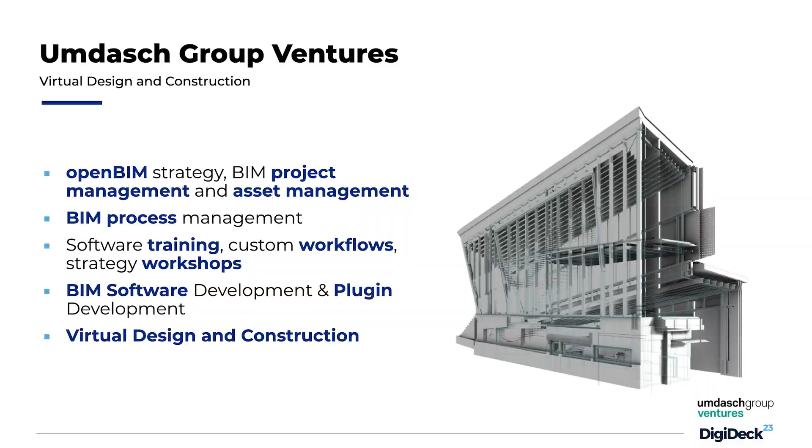We don't really actively consult and provide service for BIM, but we have a virtual design and construction area where we internally set up our open BIM strategy, BIM project management, asset management, and BIM process management. We also do software training depending on our software solution for external clients, but mainly at the moment we focus on our internal organization. So we set up our custom workflows and strategy for the workshops. Of course, we are also developing BIM software and plugin development, and dealing with many other areas.

Especially today, I brought this topic about Metaverse, specifically focused on virtual space, because one of the main core goals of our business is to create spaces. There are many technologies out there today, and most of us have heard about VR, AR, XR, and also digital twin. I've seen today the impressive bridge construction with a digital twin solution. But Metaverse is something not yet very highlighted in our construction industry.

It's quite simple, nothing different than AR, VR, and XR. The only thing we can classify is that XR, AR, VR are quite simple and easy to use, whereas Metaverse requires a very good experience of game logic. So if you are a gamer, it's very simple to use. But if you've never played a game before, then it might be a bit hard.

In terms of business use cases, you can use it for marketing, HR, hiring new employees, e-training, game analytics, e-commerce - everything is possible. But one of the core importances in Metaverse is social activity. It's driven by social activities, and it also offers different technology in terms of blockchain technology and cryptocurrency, etc.

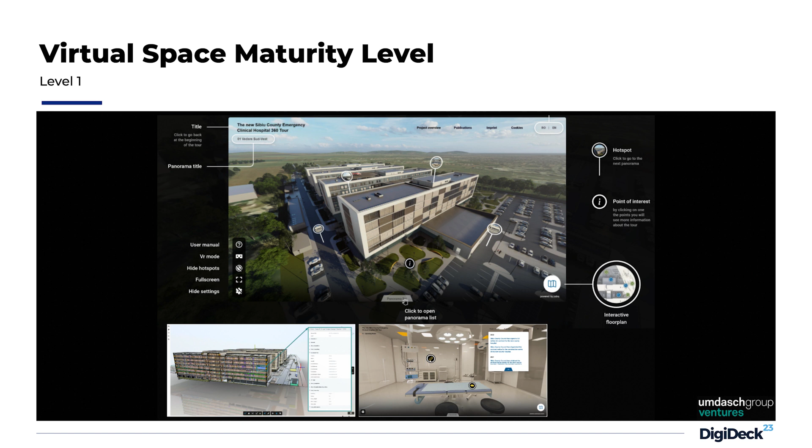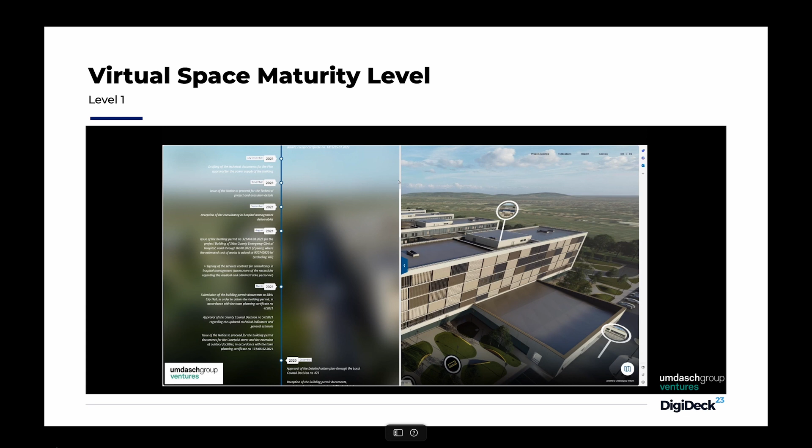In this case, we used it in the Sibiu hospital planning. The planning team was struggling to explain their proposal to the city of Sibiu, and the public fund hesitated to provide funding without understanding their planning process. So what we propose here for level 1 virtual spaces is using architectural rendering, as well as different web solutions, just like a 2D website.

Currently, we are using Web 2.0, but we are trying to evolve our web technology towards Web 3.0. Here we can see we can integrate with the web technology, with a project overview, with timeline. You can share the documents.

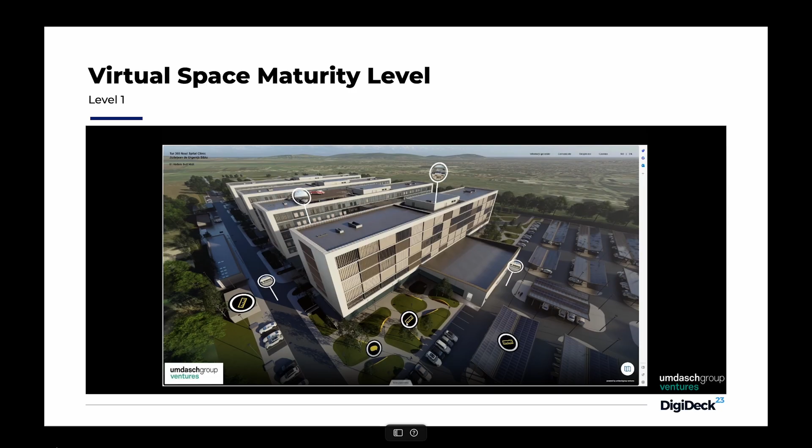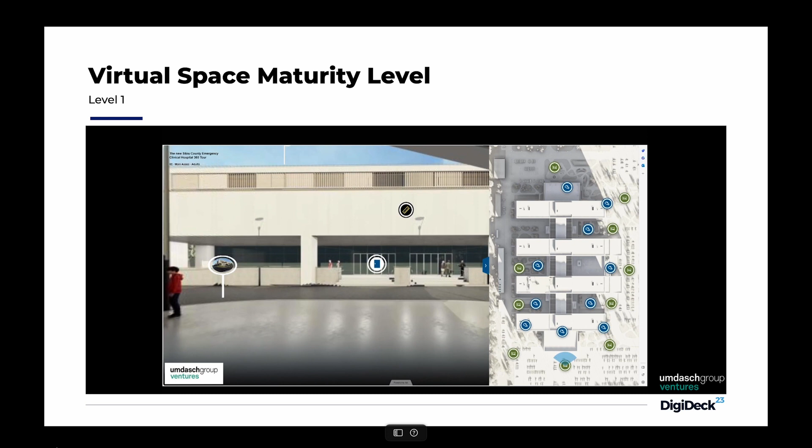You can bring a BIM model, even though it's a simple rendered image of a plan, but it gives quite enough information for public people who want to see the project without any technological knowledge. It's very easy, intuitive, and tangible.

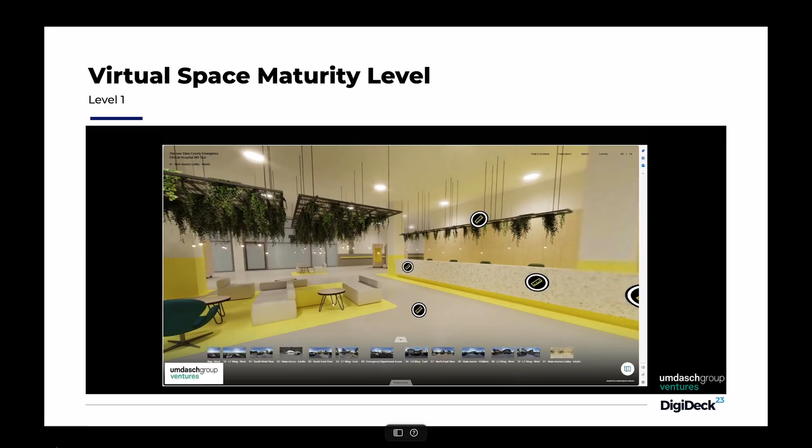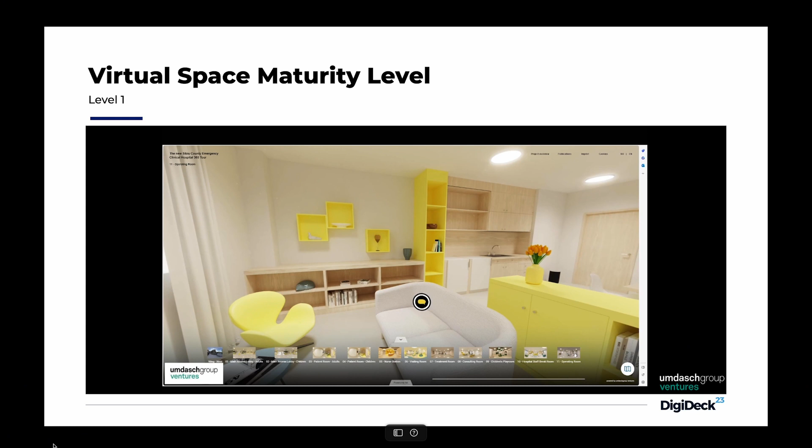And here you can see there are different hotspots you can explore. Of course, the UI and UX design is important, but as simple as possible, that's most important for level 1. Here you can see end users can just click, just like a website, and go through each different facility.

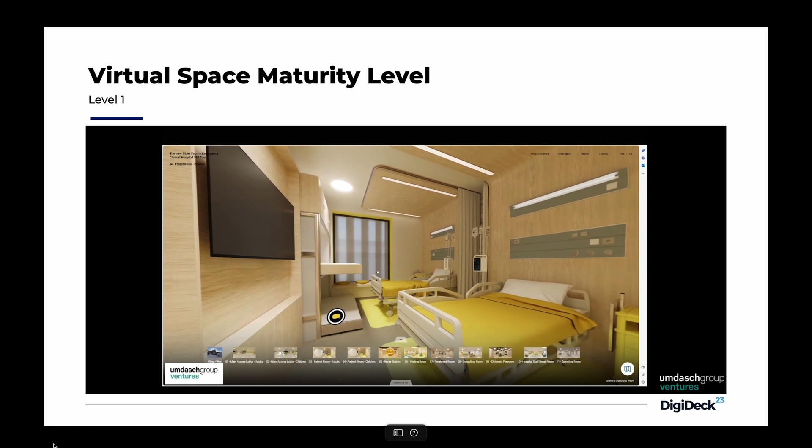Here is a break room and operation room. You can see it's nothing different than what we are doing regularly, but for ordinary people, it's a great chance to get information. Here is the nursing station and also the patient room.

So this is level 1 metaverse or virtual space, we say, and level 2 is more interaction, immersive experience needed in terms of AR and VR experience. So you can bring your BIM model to virtual space, and the big difference of the metaverse, if we define it, is you can access with multiple people, and your avatar can explore the space.

So for instance, here is the hospital, the photogrammetry model brought into the virtual space. You can change your person mode, from first-person mode to third-person mode. You can chat, you can have voice chatting, you can have a meeting.

You can bring your model into this space. You can upload, you can share, you can scale. Everything is possible. And this particular technique is necessary for pixel streaming using cloud computing.

But the thing is, everything is really possible these days. It's just a matter of how we think, how we share our approach. So we asked our team, ourselves, our company, to fund us. We would like to build something in virtual space which does not exist.

But at the same time, there was a lot of design iteration. Okay, it's a virtual building, it doesn't have to stand on ground. But when we actually realized, with a lot of design iteration, if the building doesn't make any sense in the real world, it also doesn't make sense in virtual space.

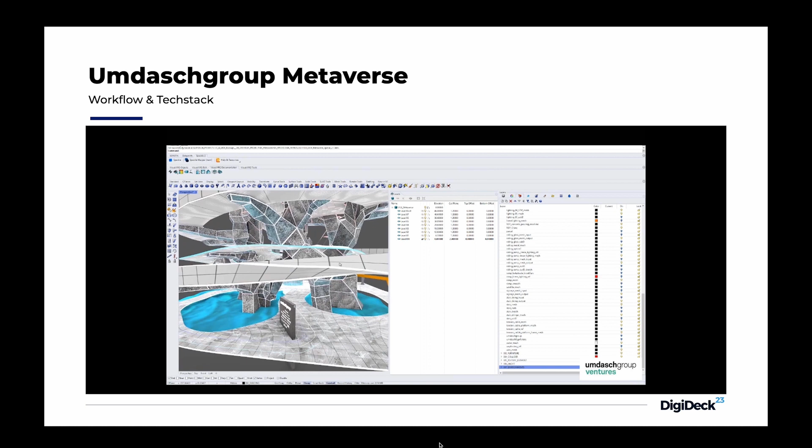So you can see here our Rhino model. It's very highly texturized and decorative because even though we scheme for somehow realistic building, in virtual space this neon graphic is very attractive because in the real world we cannot achieve that.

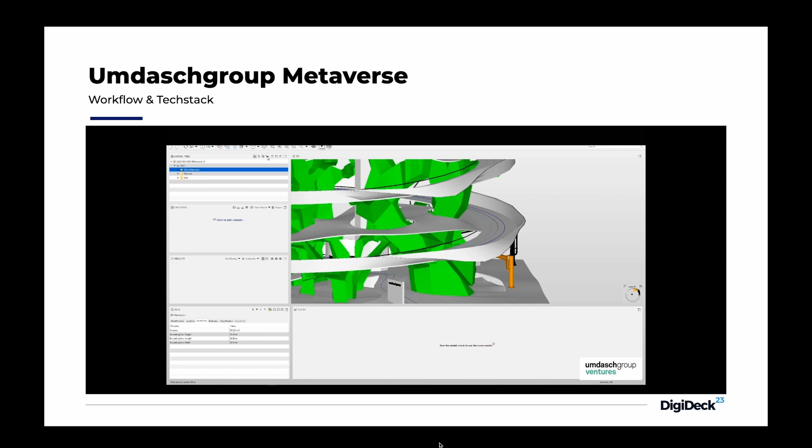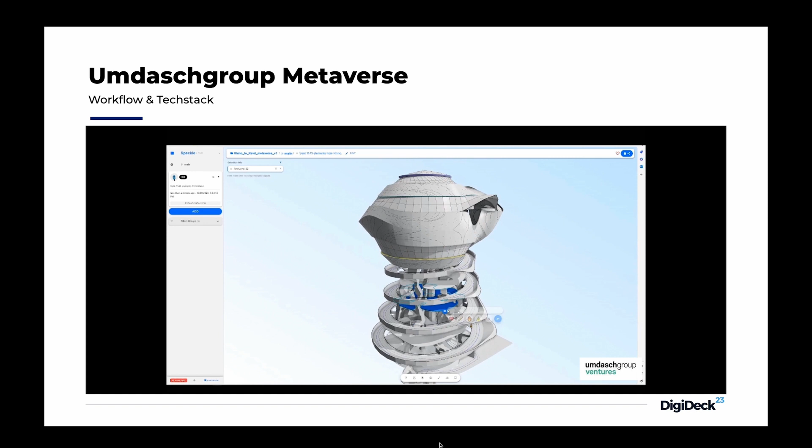But at the same time, we're giving all kinds of IFC entities. We classify all kinds of IFC entities in this building envelope and structure. And we test, okay, this is a real building, it has to be a real building. We coordinate this very structured data as information so that our programmers can later mine this structural data for their programming without any difficulties. So that's the reason why we propose it - even though it's an imaginary building, we try to keep it close to a real-world building planning process.

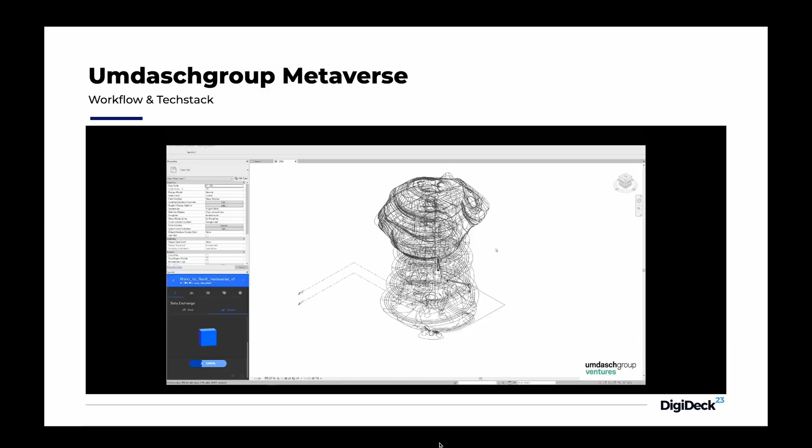And then Speckle allows us to exchange the data from a single source of truth, which was actually Rhino. But then all this kind of workflow was possible with the multidisciplinary team.

Of course, there are key workflows we have to think about. In the Metaverse, as you see in the level 2 approach, you can just bring your existing building to the virtual space, but certainly you need to re-engineer it in terms of geometrical property. You need to somehow simplify it for performance because everything goes to WebGL or web-rendered technology.

One of the important things is the Metaverse. There is no exact definition of Metaverse, but we wanted to set our pilot project in Decentraland as an initial part, because there is certainly the idea of a decentralized, community-driven platform, and also NFT and cryptocurrency are integrated.

So here we bought 4 blocks of land. At the time it was about 7,000 euros for the 4 blocks. And that was a great opportunity for us, but it was very hard for a large organization like us because we have to deal with our financial department, marketing department, as well as our management board to convince them what this digital asset is about, and what blockchain technology is in this gaming environment.